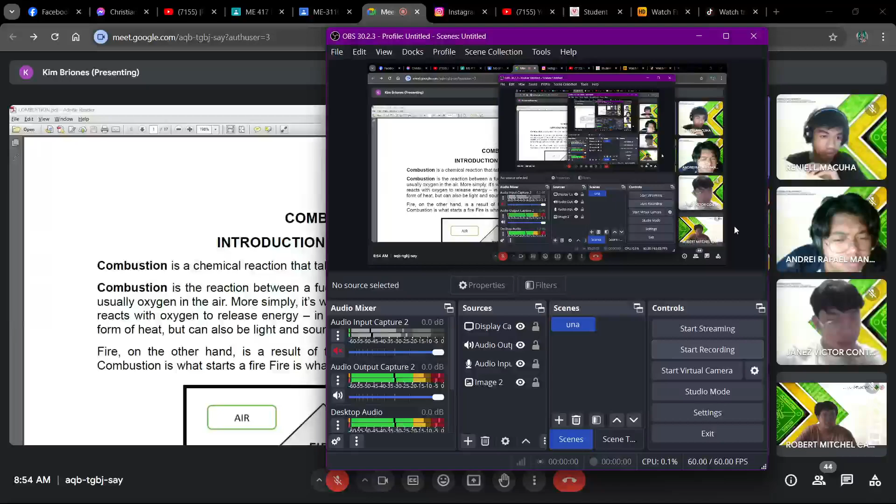You have your notes, your notebook, your ballpen, and especially a calculator is required here. If you don't have these, I believe you won't be able to answer our quiz number 1, which we will conduct on our next face-to-face meeting. Let me repeat, our quiz number 1 will be on our face-to-face meeting. So listen well as I discuss all about combustion. Let's start with the introduction of combustion.

Go ahead, read our definition for combustion. Okay, Kier, go ahead and read. Please check the attendance.

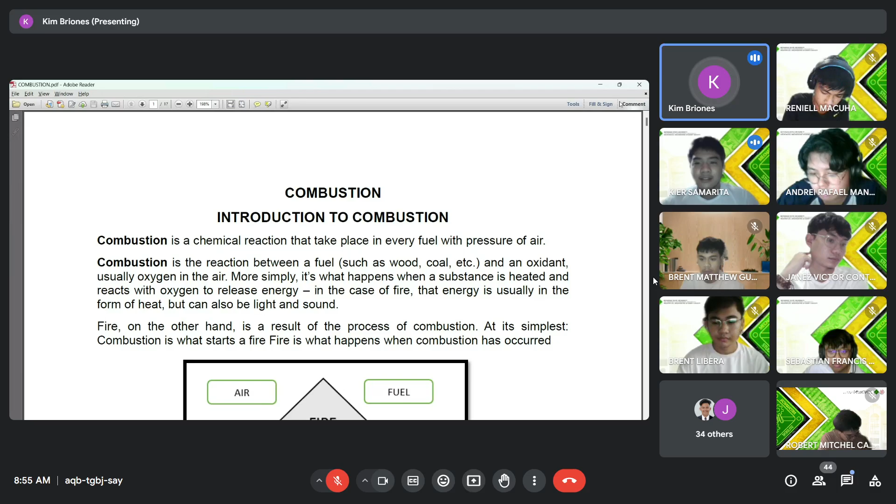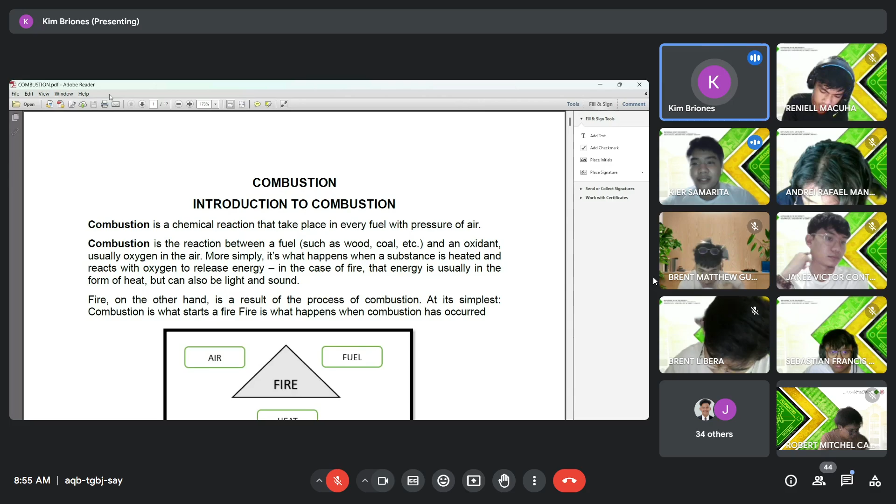Combustion is a chemical reaction that takes place in a fuel with the presence of air. Combustion is a reaction between a fuel such as wood, coal, etc., and an oxidant, usually oxygen in the air. More simply, it's what happens when a substance is heated and reacts with oxygen to release energy. In the case of fire, that energy is usually in the form of heat, but can also be light and sound. Fire, on the other hand, is a result of the process of combustion. At its simplest, combustion is what starts a fire. Fire is what happens when combustion has occurred.

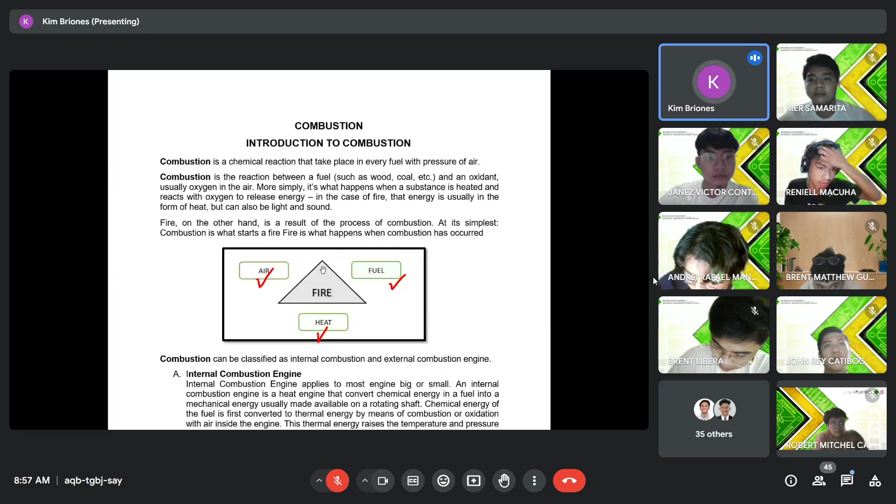It's visible now. Okay, so here, as Kier said earlier, combustion is a reaction between fuel, air, and heat. So for combustion, you cannot create combustion or fire without these three elements. We need air present, fuel present, and heat present.

For example, if there's no fuel, fire cannot occur. There will be no fire without fuel. In other words, combustion will not happen if one of the elements is not present.

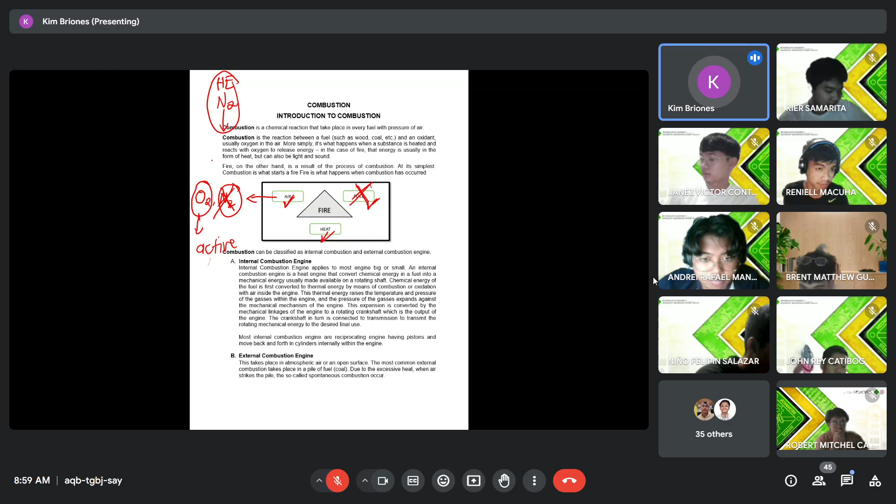And nitrogen, this is not active. In other words, you cannot produce fire using nitrogen. Notice in the periodic table of elements, in the group of noble gases, you have helium, neon, and so on and so forth. Those noble gases are non-reactive. Neon is non-reactive, our nitrogen is non-reactive. When we say non-reactive, it means they are lazy to produce fire. So they have no capability to produce fire. That's why we only consider oxygen.

So for fuel, going back, we're done with air, which has oxygen and nitrogen. Now for fuel, don't think fuel is only gases. No, no. In order to create fire, there are different types of fuel we consider. There's solid state, liquid, and gas. Don't think fuel is only gases. Solid and liquid are also considered in order to produce fire.

For example, can wood be considered as fuel? Yes or no? Does it have the capability to produce fire? Yes, sir. Can plastic also be considered a type of fuel? Yes, sir. So, all materials which are combustible, let me write this down, combustible materials, those are considered as fuel. Is that clear?

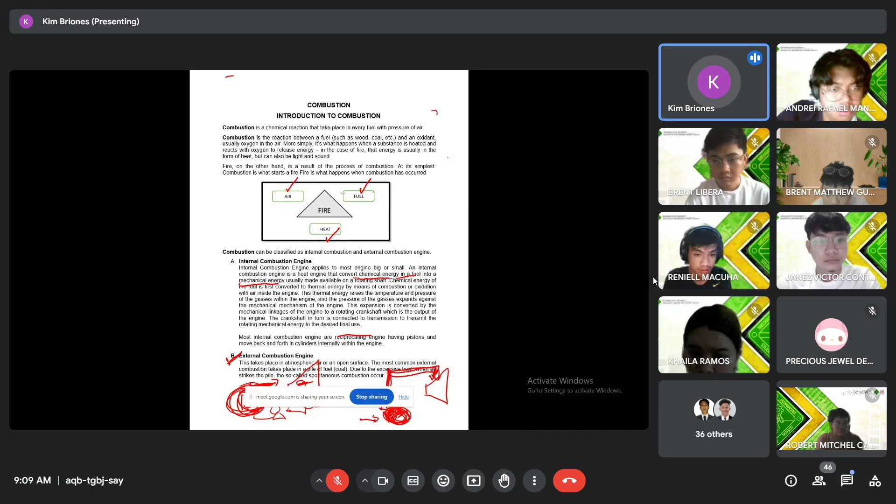Okay, so sabi sa definition, most internal combustion engines are reciprocating engines having pistons that move back and forth in cylinders internally within the engine. Sir, ano po yung pinakamagandang example? Paano namin maiintindihan itong internal combustion engine at ano yung pinagkaiba ng internal combustion engine sa external combustion engine?

Ang internal combustion engine, example, is like a diesel engine. Diba sa diesel engine? Example sa mga sasakyan naman. Kung kanina power cycle sa mga sasakyan. Halimbawa, may engine. Ngayon, syempre sa engine ito may cylinder.

First time kong magawa ng jam, mahirap pala siya. Paano mag-delete? Erase. Ulit, sorry.

Magandang example is yung mga engine sa sasakyan. Halimbawa, may cylinder. Ngayon, kadalasan, ang internal combustion engine, ang pinakamagandang example niyan is yung mga sasakyan.

Yung combustion is happen during combustion. Sige, sabihin ko na lang, ang combustion ay nagaganap inside the cylinder.

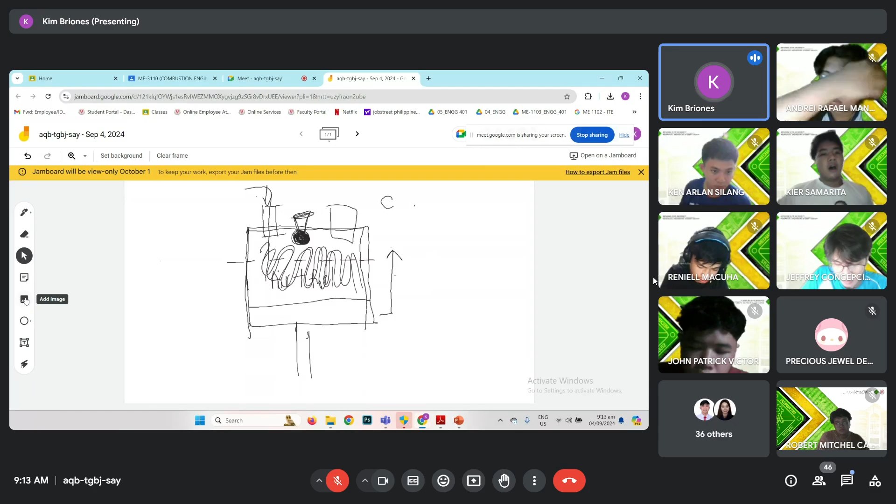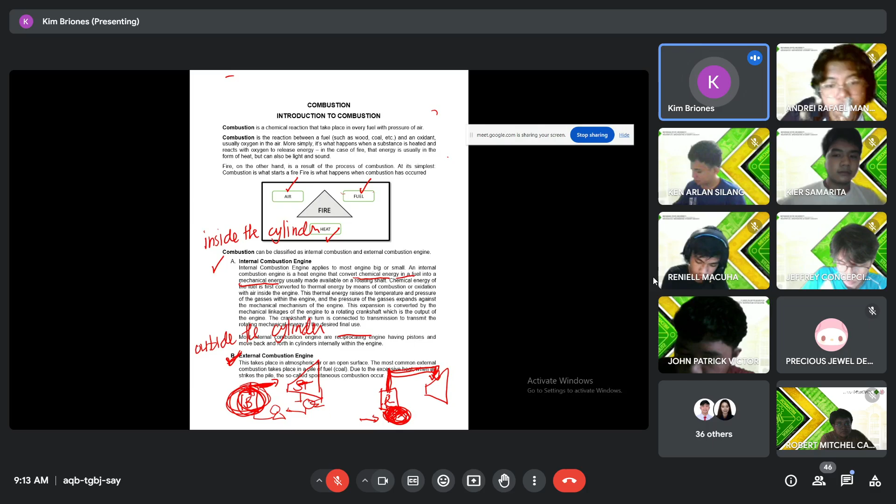Basahin natin yung sunod. Alam ko na pinagkaiba ng internal combustion engine sa external combustion engine. Ang combustion, sa internal combustion engine, combustion occurs, ganun lang kasimple, combustion occurs inside the cylinder. However, on the external combustion engine, the combustion occurs outside the cylinder or outside the engine. No, inside the engine or a combustion chamber or outside the engine. Maliwanag po.

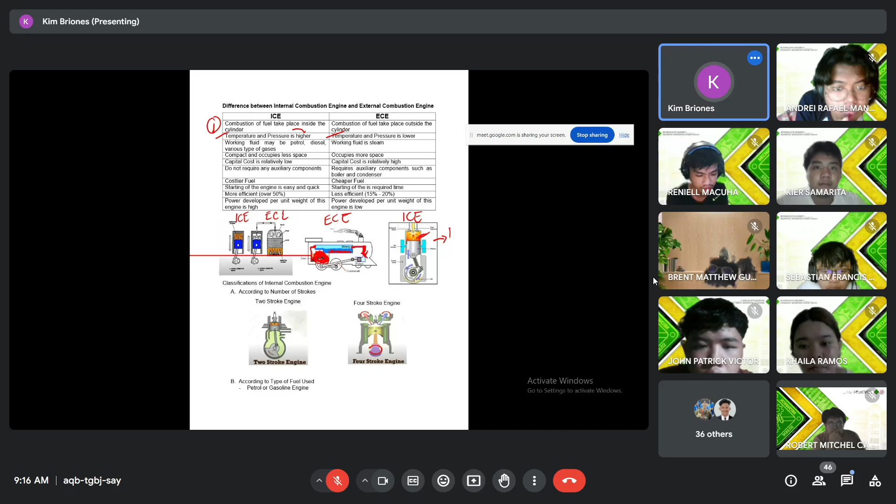Di ba, hindi naman connected yung combustion chamber na to or yung cylinder dito sa coal na to. So, ngayon, yung heat that is being produced by the coal is pupunta dito sa ating combustion chamber. So, ngayon, dito pa lang makakapag-produce ng heat. Yung heat and pressure that is being produced here in the boiler, pagpapunta dito sa piston, pag nag-travel siya, di ba may mga losses? So, pag may mga losses, so that means bumababa yung temperature and pressure niya.

Mas mataas talaga yung pressure and temperature ng internal combustion engine sa external combustion engine. Bakit? Makakapag-produce tayo dito ng mechanical energy at heat energy, kaya yung heat energy that will move from the piston is much lower compared dito sa internal combustion engine.

The next one, the working fluid may be petrol, diesel, or various type of gases. Kadalasan sa ating internal combustion engine, ang ginagamit natin is yung gasoline engine, or yung diesel. Yun yung mga kadalasan ginagamit natin na working fluid.

Pagdating para makapag-produce ng heat sa internal combustion engine. On the other hand, pag sa external combustion engine, ang working fluid natin is steam, lagi. Laging may boiler, and then yung boiler meron dito coal or any form of fuels. Pwede ring diesel, yun nga lang, yung fluid na ilalabas ng boiler is steam.

And then, it is a compact and occupies less space. Dito, more space. Kung mapapansin nyo dito sa dalawang picture natin, sa ICE at saka sa ECE, kung mapapansin nyo yung space niya dito sa example, sa train, it requires more space compared dito sa internal combustion engine. Kasi dito sa internal combustion engine, in order to produce combustion, isa lang, engine lang, gas engine lang, or gas turbine lang, isang cylinder lang, which is the gas engine.

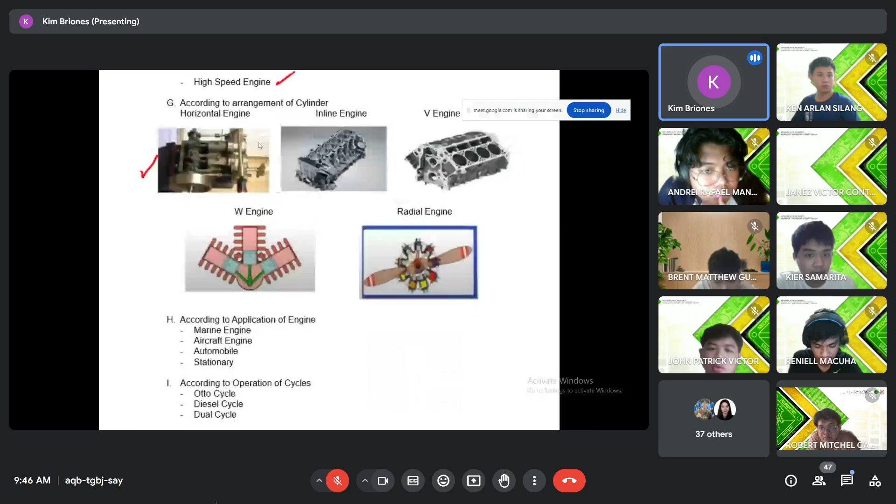Yung cylinder natin dito is naka-horizontal, inline engine, meaning to say naka-vertical yung ating engine, nakaangat. Yung sa example ko kanina, those type is an inline engine. V-line engine, pag V-line engine, naka-V, V-type.

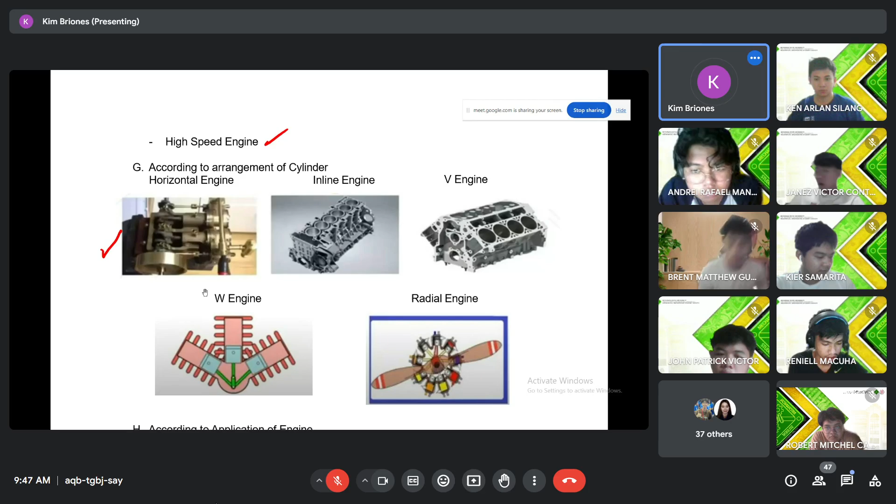O meron dito, kumbaga papaganto yan. W engine, so kapag W, papansin yung tatlo, W yan. And the radial engine, kapag halimbawa ginagamitan ng circular, kung mapapansin ninyo yung ating cylinder is in radial form, so those are considered as a radial engine.

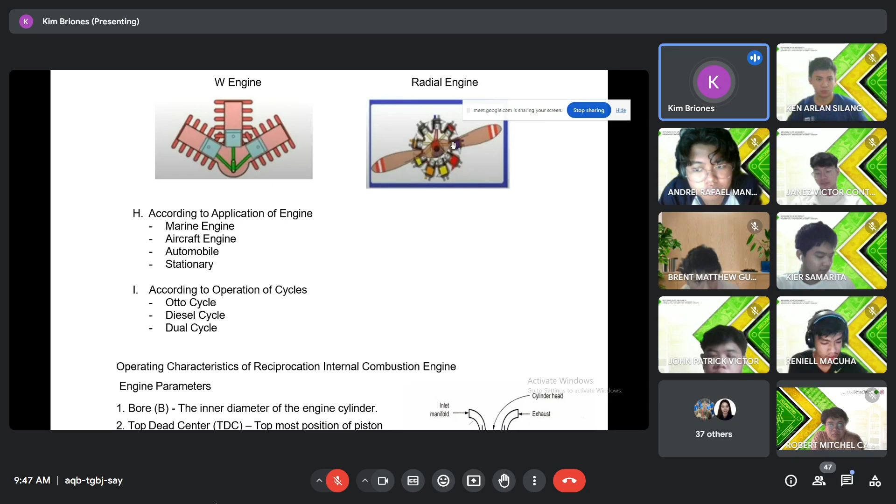So according to applications of the engine, yun nga sabi ko nga sa inyo, yung speed of the engine depends on the applications of the engine. Marine engine, aircraft engine, automobile, stationary. Kadalasan mag-focus tayo sa automobile yan. According to the operations of cycle, Otto cycle, diesel cycle, dual cycle. So yun yung mga i-discuss natin na lectures all about internal combustion engine for the competitions.

So do you have questions po regarding the classifications of the engine, especially yung 4-stroke engine and 2-stroke engine? Do you have questions? Naiintindihan yung classifications ng engine? Yes po sir, internal combustion engine pala. Do you have questions so far? Wala pa naman po.

Sige, kung wala kayong question, our next topic, I think this is next topic natin, which is chapter 2, is all about the operating characteristics of reciprocating internal combustion engine.

So naku yan, mas kita ba? Kita nyo? Kita nyo yung drawing? Nababasa nyo? Yes po sir, okay. So sige, ngayon mag-focus tayo sa 4-stroke since ang Otto cycle, diesel cycle, and dual cycle is considered as a 4-stroke internal combustion engine. So ngayon pag-uusapan natin, and those cycle is considered as reciprocating internal combustion engine. Yung 4-stroke po is considered as a reciprocating internal combustion engine.

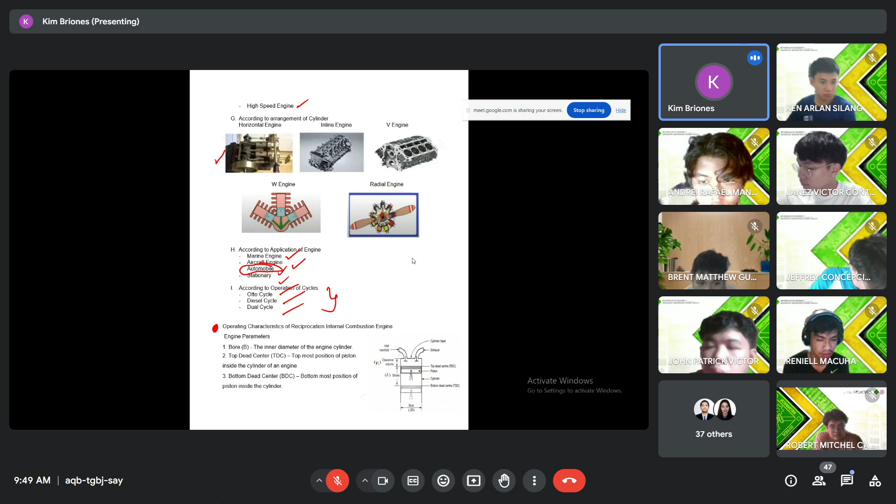So but before that, let us elaborate. Let us elaborate first itong according to the method of ignition which is spark plug and fuel injector. Okay, sa spark plug and fuel injector, ano ba yung pinagkaiba pala ng dalawa?

So bago tayo magpunta sa parameters, no, so same lang din yan. For example, 4-stroke, example lang ha, 4-stroke. Okay, ito ay sasabihin ko na lang ha. Take note, this one, itong application na to is kasama sa exam natin. Hindi ko ilalagay sa PowerPoint. Gusto ko kayo ang mag-take note ng mga sasabihin kong application ng two types of ignition, which is the spark ignition and the compression.

So dito, ang tinatawag kasi natin na spark ignition is a gasoline engine. On the other hand, kapag compression ignition, ang tawag dyan is diesel engine. O, punta muna tayo sa gasoline engine. Ano ba yung gasoline engine? So ang working fluid nito is syempre gasoline or petrol. Tatandaan na, for gasoline engine, ang working fluid is gasoline. From the word itself, gasoline engine.

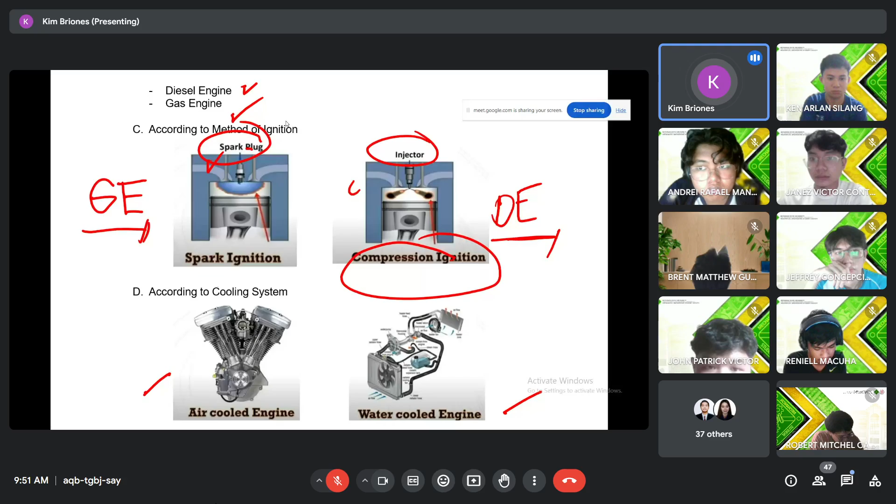So in order to produce combustion, gagamitan natin ng device which is yung spark plug. Ito, ito yon, gagamitan natin ng spark plug. Kung mapapansin nyo dito yung sinasabi ko sa inyo kanina, yung piston will move upward and then the device is spark plug. So in order to produce combustion, no, syempre mataas yung air fuel pressure and temperature niyan. Pag itong spark plug gumana to, sumabog to, nagkaroon ng spark, combustion will happen. And then syempre combustion will happen, bababa yung piston and heat is generated.

Once the heat is generated, yung heat will move to the exhaust line to discharge. Ganyan yung gasoline, no, ganun lang gasoline. Yung working fluid is air and gas, and ang device is spark plug. Ganun lang kasimple, ulitin ko ha. Sa gasoline, ang type of fluid is gasoline. Ang inlet is air plus fuel, which is the gasoline. And power stroke happens when the air and fuel is compressed and there will be spark for the ignition, for the spark plug.

Ay ganun lang, paano pag diesel engine? Same lang din, 4-stroke, halimbawa 4-stroke. Ngayon, ang unang tatandaan ninyo, for the inlet, ang papasok, una muna, working fluid is diesel.

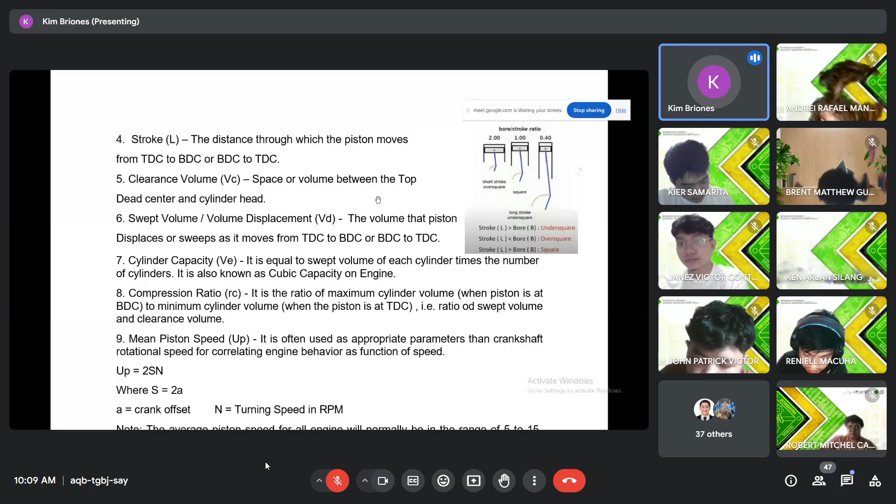Okay. Sige. Clearance volume, it is the space, again, from the bottom dead center to the top dead center or top dead center to the bottom dead center. Stroke pa din yan. Clearance volume is the spaces or volume between the top dead center and the cylinder head. Ang cylinder head natin, syempre, head nga nasa taas yan. Example, this one is the cylinder head. Ang clearance volume natin is ito. Ito yung na-compress nating air and fuel. Maliwanag? Ganun lang kasimple.

Okay guys? Yes po. Yeah. If you have questions, try to speak. May question? Feel ko may nag-raise na nga.

Wala. Sige. Next one. Clearance volume, swept volume. Sabi dito, swept volume or volume displacement is the volume that piston displaces or sweeps as it moves from the top dead center to the bottom dead center or the bottom dead center to the top dead center.

Yes po, sir. It is the space where the bottom dead center and the top dead center is being traveled. Yan yung ating napakagandang example nito. Volume displacement, clearance volume and volume displacement.

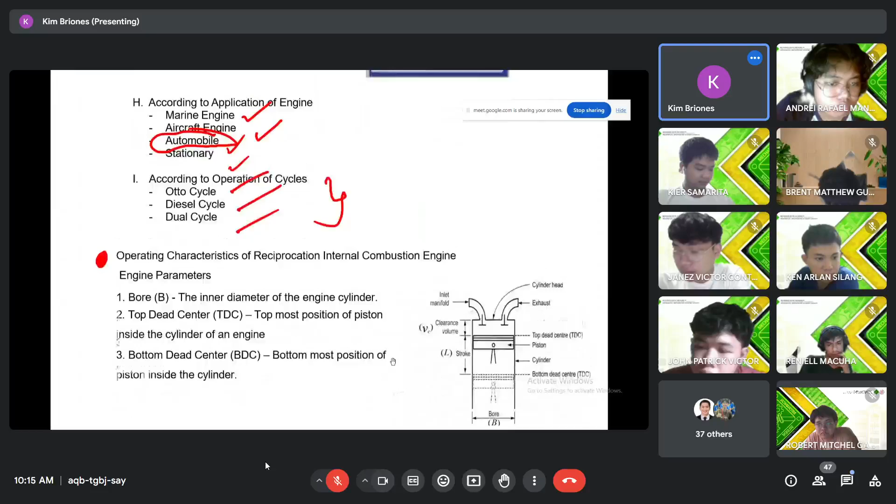Naiintindihan niyo ba ang engine parameters, engineers? Yes po sir. Ulitin ko ha.

Kapag ang piston ay nandito pa, ang tawag dyan ay bottom dead center. If the piston is located at the top, ang tawag dyan ay top dead center. Ang bore ay ang inner diameter o ang diameter ng engine.

This one is the inlet, siyempre ang inlet manifold. Dito pag may inlet manifold, may valve. On the other hand, kapag may inlet, may exhaust manifold at exhaust valve.

Ngayon kapag ang piston natin ay na-reach niya ang topmost position, ang tawag dito sa volume na ito ay clearance volume. Ang stroke ay ang distance na na-travel mula sa bottom dead center hanggang top dead center. Kung may stroke dito, ito ang tinatawag nating volume displacement. So ganun lang naman ang dapat nating tandaan pagdating sa engine parameters.

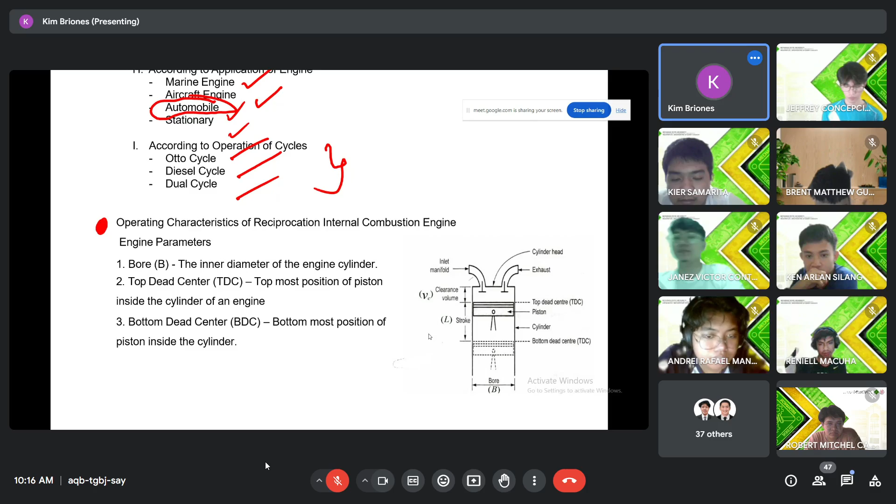Do you have questions regarding sa engine parameters? Wala naman po sir. Naiintindihan? Yes po sir. So makakasagot kayo ng application ng terms.

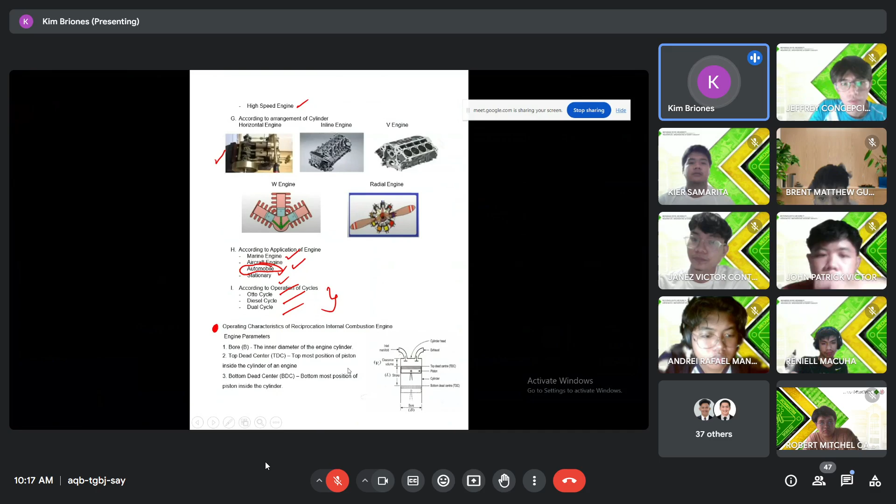Again ha, kung mapapansin niyo, hindi ko lahat sinusulat ang aking mga sinasabi, so you have to take note of that. Kasi ididepende ko kung talaga naiintindihan ng mga estudyante ko based on my explanation. That's why I'm just asking each one of you if naiintindihan niyo ang aking mga sinasabi.

So another note to be remembered: the bore size of engine ranges from 0.5 meter to 0.5 centimeter, or 20 inches to 0.2 inches. Pero right now, I think ito naman ay applicable para sa 4-stroke engine. Pero depende, nakadepende ang bore size sa application ng engine. Siyempre pag mga marine engine, iba na ang magiging bore size. Siguro sinasabi lang nito ay under the 4-stroke engine.

So the ratio of the bore to stroke for small engine is usually 0.8 to 1.2. An engine with bore equals stroke is often called a square engine. If stroke is longer than the bore diameter, the engine is under square. Very large engines are always under square, with stroke length up to 4 times bore diameter.

In the industry, take note of this one. Kadalasan, ang ginagamit nila ay either over square, under square, o square engine. Ano po ba ang pinagkaiba ng tatlo?

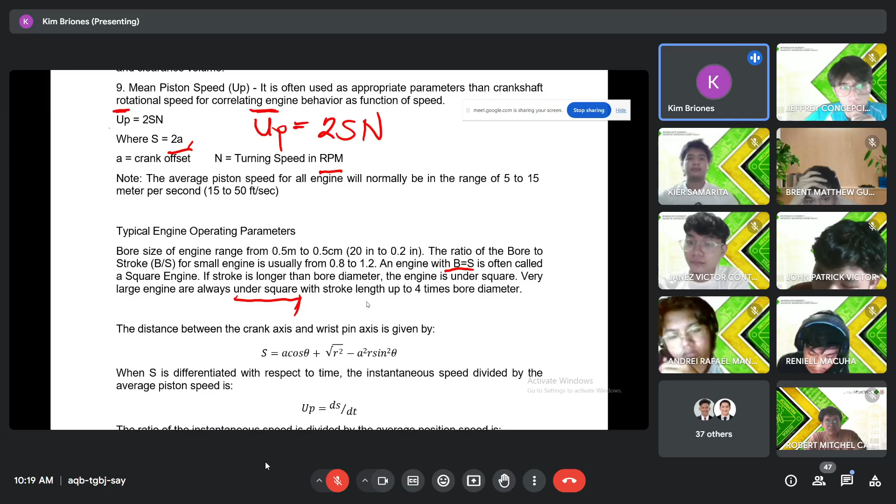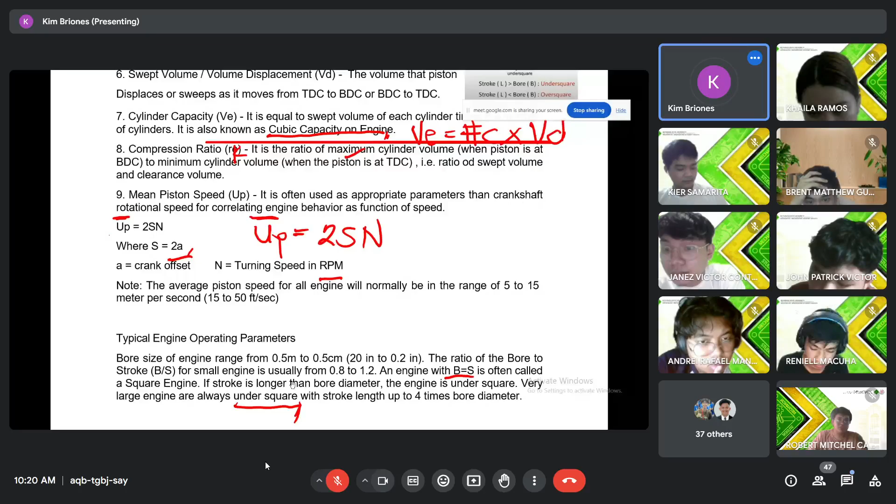Ano lang, kasimple. Pag mas mataas ang bore sa stroke, anong tawag sa kanya? Over square. Pag mas mataas ang stroke naman sa bore, ito ay under square. Kapag equal ang bore sa stroke, ito ay square engine.

So ngayon let's start to have computations para sa typical operating parameters. Ang distance between the crank and the wrist pin axis ay given, ganito: S is equals to A cosine theta plus square root of R squared minus A squared sine squared theta, where S is differentiated with respect to, where S is the distance na na-travel mula sa crank axis hanggang wrist pin.

Ang A natin ay ang crank offset. Ano nga ang R? Ang A ay ang crank offset, ang R ay ang piston's position, ang position ng piston o ang distance ng position.

Ayan na, so through that, makokompute niyo na ang position ng piston rod, rather, position ng piston rod. Example, nandito ang crankshaft, nandito ang crank. May connecting rod tayo na ganito. Ang R dyan ay ito, ang position ng connecting rod mula sa crankshaft hanggang sa piston.

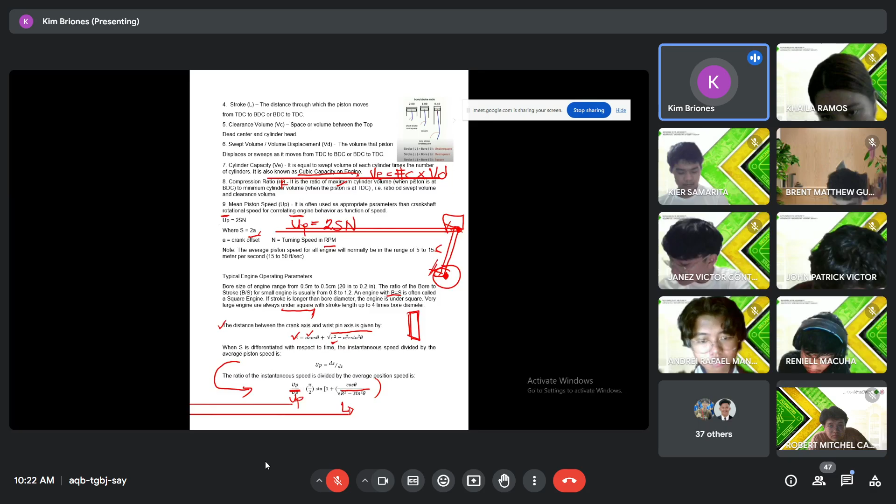I have to confirm lang siguro, nakalimutan ko yung R squared kung anong ibig sabihin. Basta ikaw, mamaya, makikita naman natin kung ano yung ibig sabihin ng R na malaki.

Where R is the ratio of the connecting rod length to crank offset, and usually has the values of 3 to 4 for small engine, increasing to 5 to 10 for the largest engine. Kadalasan naman, binibigay yung ating crank offset, binibigay yung length of the connecting rod, at binibigay din naman yung crank offset, so madedetermine naman natin yung R. If hindi ibinigay itong dalawang ito, and you cannot determine the value of the capital R, ididepende natin doon sa type of the engine. Example, siya ay small engine, possible 3 to 4, pwede natin gamitin 3 or 4. Pero pag large engine, 5 to 10. So basically, magsiset na lang kayo ng standard, ano ba yung gagamitin na R o ratio noong connecting rod length to crank offset.

For the displacement volume, ang VD natin is the volume of the bottom dead center to the top dead center. Ano mas malaki, bottom dead center or top dead center? Anong mas malaking value, anong mas malaking volume? Bottom dead center, sir. Again, top dead center or bottom dead center? Bottom dead center. Kaya mas una, yung bottom dead center will be subtracted to the top dead center. Again, yung piston, pag located at the bottom dead center, yung space ng cylinder is much higher compared kapag kinumpress na natin siya.